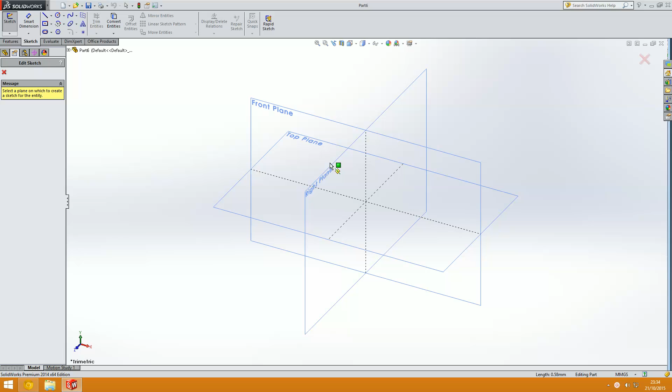So the first thing we're going to do is jump into Solidworks and make a new part. We're going to take a sketch and sketch it on the right hand plane, because we're looking at the leg from the right hand side, or the left hand side, doesn't really matter, we always use the right plane.

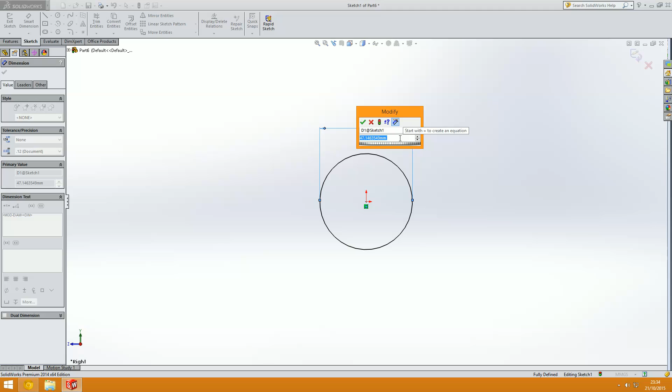So we're going to start by drawing this circle here. It's got a radius of 3.9 mil, so we choose circle, center point, move away, and then smart dimension it. It has a radius of 3.9, which means a diameter of 7.8, so I'm just going to put that in here: 7.8.

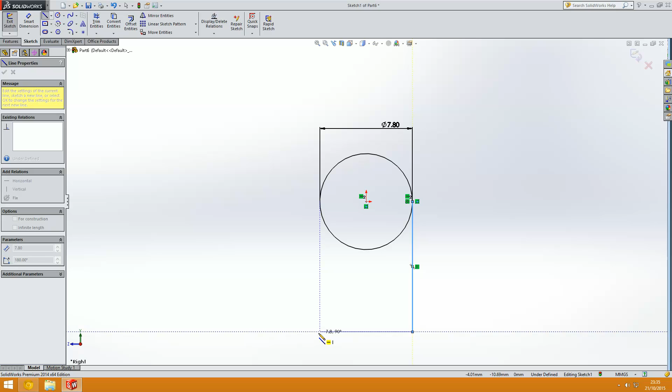Done. So next we want a line going down for 11mm, across for 7.8, up for 3.2, and then back in for 2. Let's do that to begin with. We take the line tool, start at the edge here, and come straight down, then go across 7.8, then up by 3.2, and in by 2. Let's measure those off first.

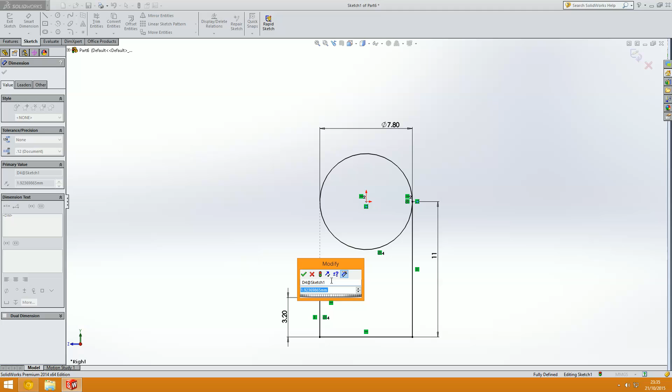Smart dimension: this one is going to be exactly 11, this one needs to be 7.8, but that's already set because we did it exactly the right width, so it's got that dimension line already. We need a height here of 3.2 millimeters, and this line coming in here should be exactly 2 millimeters. Then I'm going to do one more line which goes vertically up from this point.

That's all of the shapes that we need for this, so we're just going to trim and get rid of these two pieces. And that's it, the outline of our Lego leg. We're going to finish, press finish again.

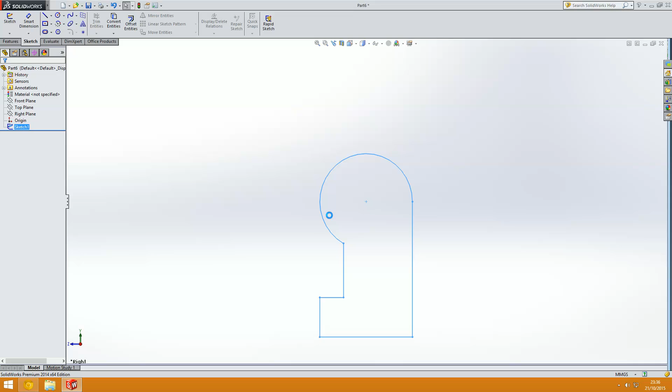Then we go to features, extrude, and we can check our data sheet, and it says 6.25mm wide with a 3mm hole, but 6.25 is what we want to begin with, so let's just set that here, 6.25mm.

Wait for Solidworks to finish, click the tick, and we're done. One Lego leg.

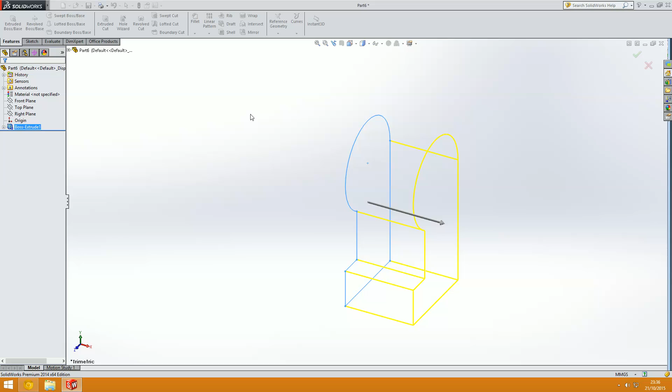So let's add the hole. Depending on whether or not it is the left leg or the right leg, the hole has to be on a different side, so we're just going to do the left leg today. What you could do is save this leg at this point, open it, add the left bit, then make a copy of the saved version and do it on the right. But we'll just do one for today.

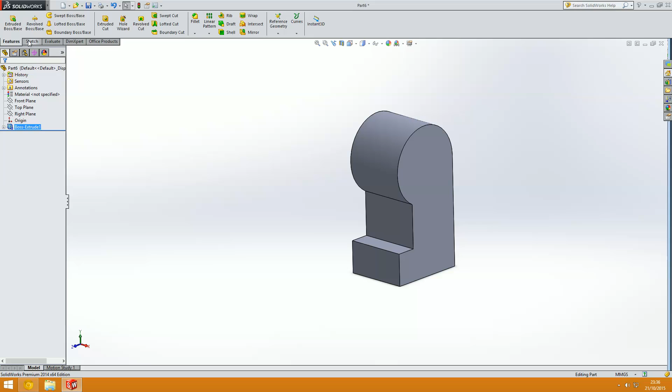So we're going to choose sketch, sketch, and choose this side. Choose a center point circle, and because we drew the last circle on the origin, this one is going to be on the origin too. We said we want it to be with a radius of, I think it was 2.5 - let's just check, it is. Good, 2.5 millimeters.

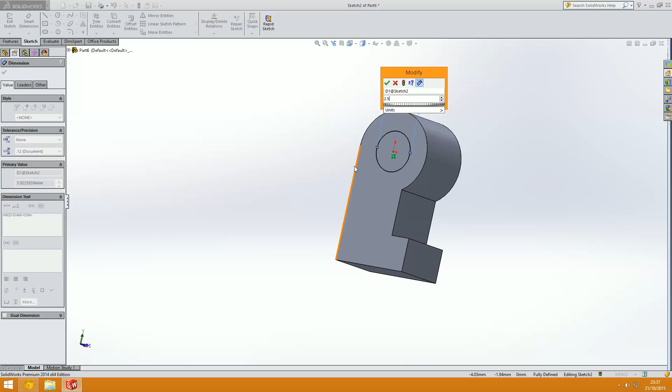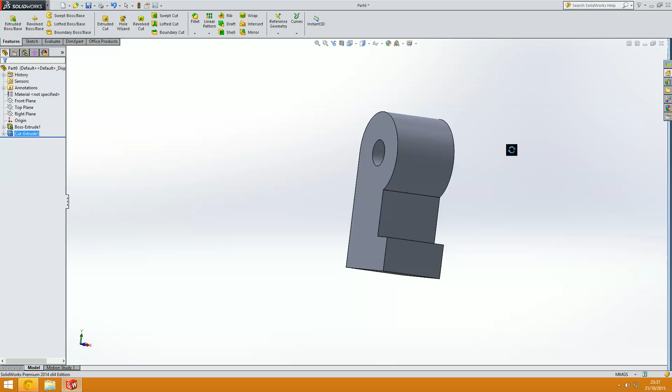Press finish. And then we can use features, extrude cut, to a width of 3mm. There we go, that is one Lego leg finished.

So if you wanted to do anything more complex, you could. This is the basic outline, this would be pretty happy, but if you wanted to do more than this, you could go and add a couple of other things. On the back of a Lego leg there is normally a hole about here, which is 4mm, and on the bottom there is also a hole. I'm going to add those here, but you don't need to if you don't want to.

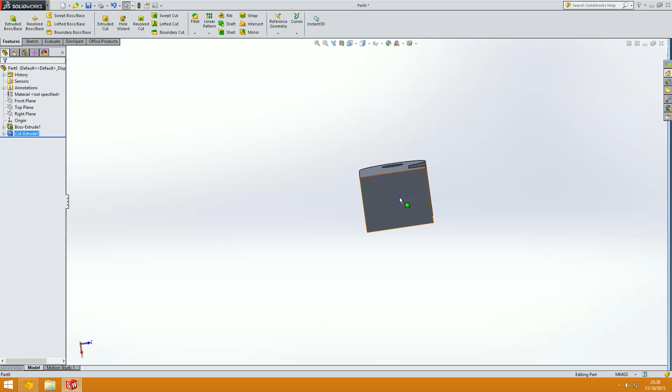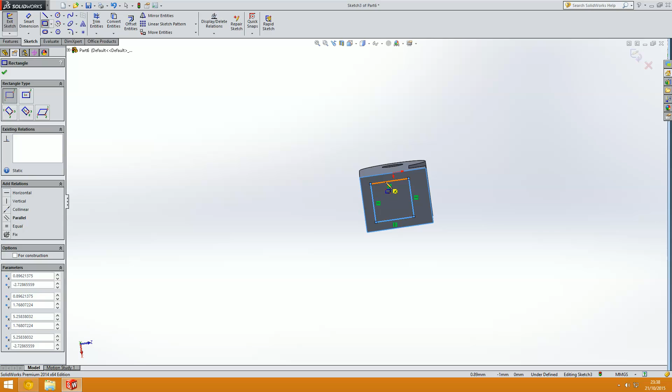So we're going to choose sketch. I'm going to choose a regular rectangle this time, and draw it on the back here like this, and say that it has a smart dimension of 4mm. Oh, that went wrong.

Smart dimension of 4mm, and also on this side 4mm. And I want it to also be equal on either side, equal distance from here and equal distance from here. So we know that it is 6.25mm wide and that this is 4mm.

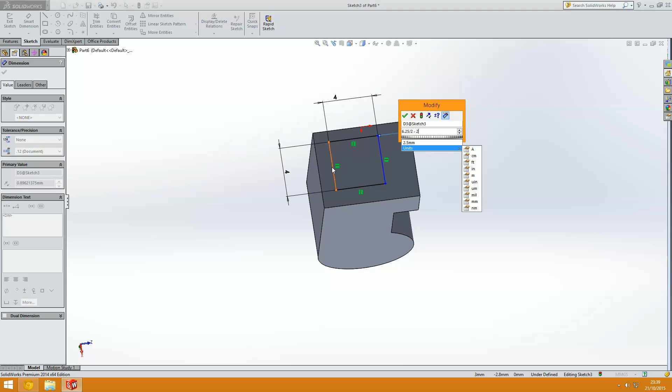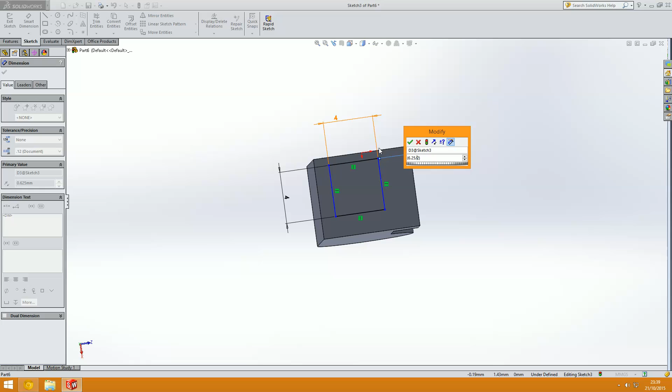So what we want to do is 6.25 divided by 2, minus 2, because that will give us half the width minus half of this distance. 0.63 - has something gone wrong there? I think it has. Let's try that again: 6.25 divided by 2, we'll put that in brackets, minus 2. 1.13. There we go, that's what we wanted.

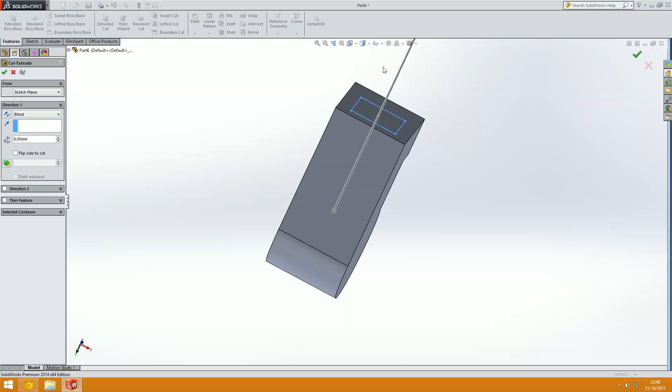Maybe the brackets were wrong. So I'm going to finish that and extrude cut, deep up inside the leg. I don't have an exact measurement for this, so we'll just eyeball it. There we go. So now the Lego man has the hole in his foot, so he can stand effectively on a Lego block.

And we're going to put the circle on the back here. So let's do the same: sketch, sketch, choose the back. We're going to put a circle on the back, and again there's no way of me really lining this up, so I'll just put it on here for the moment. I'm going to choose this as 4mm.

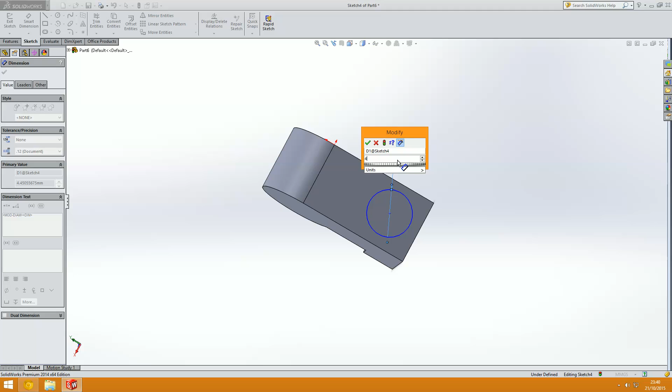Then we're going to choose a distance from the bottom. I don't have the specific one, so I'm just going to say it's 3.5 and hope, and then we need to do a distance from the side, so center. We can choose smart dimension from the side to the center point, and say that it is 6.25 divided by 2. Done.

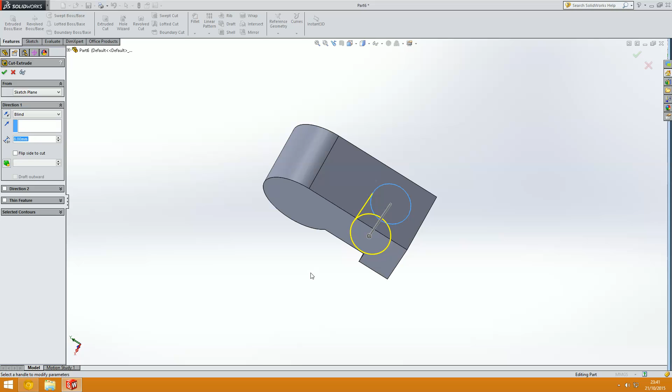So I'm going to extrude cut this just through deep enough that it cuts into the centre of this leg. There we go. And that, ladies and gentlemen, is how you would make a Lego foot.